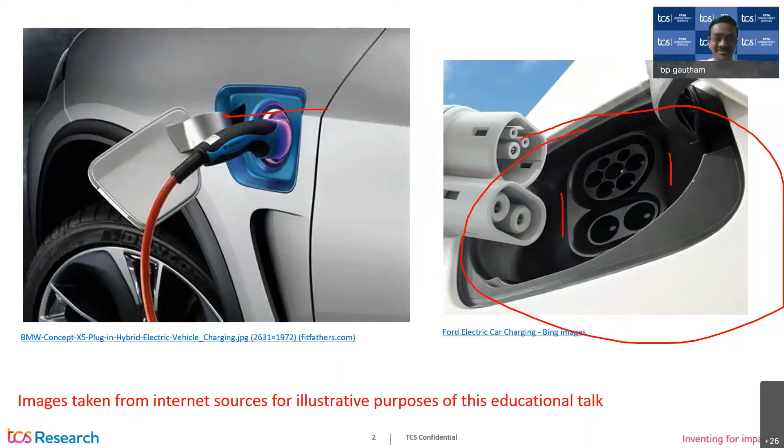So I thought I would give a very interesting though unusual example where people unexpectedly stepping on something cause it to break. But if you really go to the manufacturing industry, what are the key things that everybody talks about? One is the time to market and the cost. These are problems that existed all along, and there is nothing particularly new there. But what is even more challenging these days is mass customization. People want varieties of variants of products that suit their tastes and needs. And then another major aspect is to take care of sustainability.

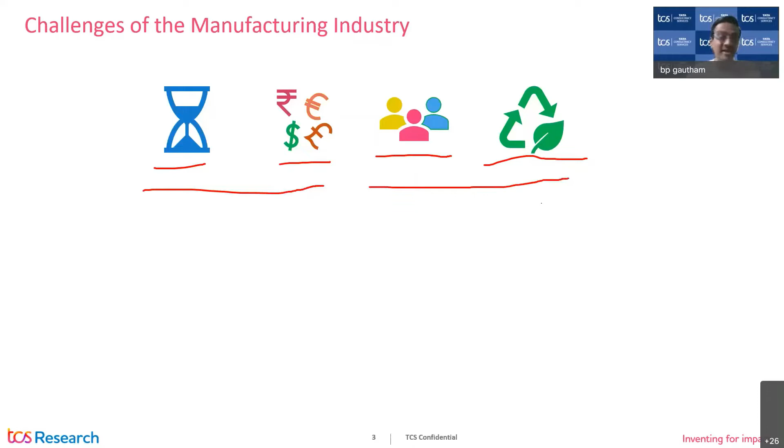It is no longer about recycling, but it's also about cradle to cradle. That is what is required. So besides these two aspects and the increasing competition, the mass customization and sustainability is introducing even greater challenges.

So one has to look at the entire life cycle, all the way from raw materials where they are sourced to the intermediate material products, and how we design using these intermediate material products from component levels to systems level, how these are manufactured and how do they manifest as products, and how do you take care of their service, and how do you really look at the end of the life.

All of this has to be kept in mind while making all the design decisions that we are making and the manufacturing decisions. When I say design, it is about product design, it is about manufacturing design, it is about service design. All of that have to come into picture.

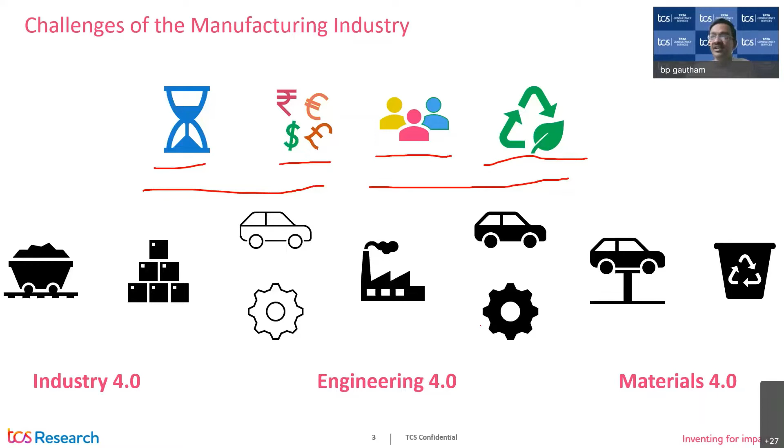And needless to say, the big buzzwords that you keep hearing are industry 4.0, engineering 4.0, materials 4.0. Well, these are very nice, catchy phrases used well and abused equally. Nevertheless, they convey a message that there is a large amount of industrial transformation that is occurring, and it is predominantly driven by the world of digital of various forms, and that is what is going to make these additional responsibilities that are coming on the manufacturing industries happen.

So what is the need of the hour is to look at the problem in an integrated fashion across materials, processes, products. Very often while designing the products, people take material as some kind of a catalog system and use those products. Of course, there will be local manufacturing knowledge associated with it, but there is generally very little tight integration with manufacturing while taking process decisions, while taking product design.

So this is something that has to be brought in, and that is what we feel, at least I believe, will bring in a significant paradigm shift in meeting the needs of modern product engineering, whether it is sustainability, whether it is lightweighting of an automobile, whether it is reducing the cost, all of these aspects.

So for the needs, as we discussed, we require an accelerated product development. So right in the early stage, we have to consider many aspects, including manufacture and recycle. Needless to say, we have to reduce prototyping and experiments to accelerate the product development, and a huge amount of focus on sustainability and circularity is also driving a lot of product innovations these days.

That requires working very closely with manufacturing processes in the product development. So we need to optimize the whole thing in an integrated fashion, integrated with processes. And when you're actually manufacturing, knowing exactly where we are going to use the products, if there are deviations, we need to take dynamic process decisions, and all of that learning coming from the plants has to feed back into the design.

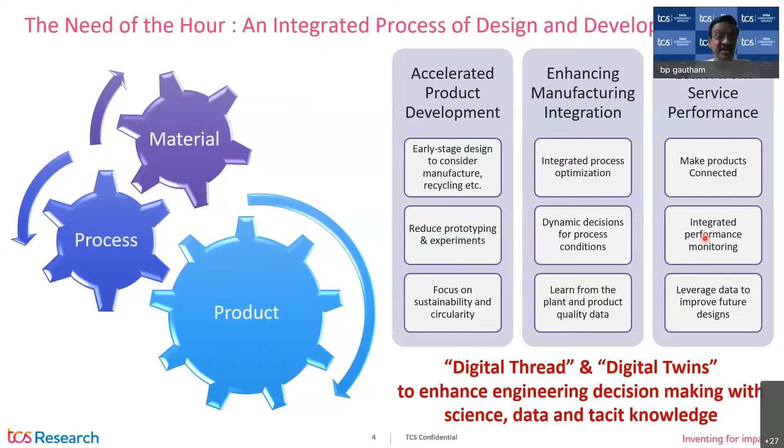So I will focus predominantly from a materials perspective in this talk. So what are the challenges with materials? Materials development and their deployment take a huge amount of time. If you take an aerospace material, the typical cycle is about 20 to 25 years, from the day you conceive a material, to develop that material, produce it in a form that is robust enough to be used in an aircraft, establish the design allowables with which you can design an aircraft, and put it in, design it and test it out.

It's a long cycle. And in automotive, typically, it is not uncommon to talk about anywhere between 8 to 10 years to introduce a material and start designing with it. So it's a huge amount of time. Why? That is because of the complexity of the materials, right?

We are talking about all the way certain effects will be at a quantum level. Sometimes corrosion is impacted by the electronic behavior of the underlying material and so on. The material itself is going through a huge cycle in which it is evolving all the way from raw materials to intermediate products to final products that are going into, let's say, our vehicles. I will take vehicles as an example to drive most of my talk today.

So what we need is discovery of materials with desired properties and recyclability. Now recyclability is becoming a big issue. That is something very, very important, and for next generation materials, this will become a driver for the new materials. Scaling up of processing from lab to bulk: very often materials fail because we can produce and show fantastic properties in a lab, but they can't be produced in bulk with repeatable, consistent properties.

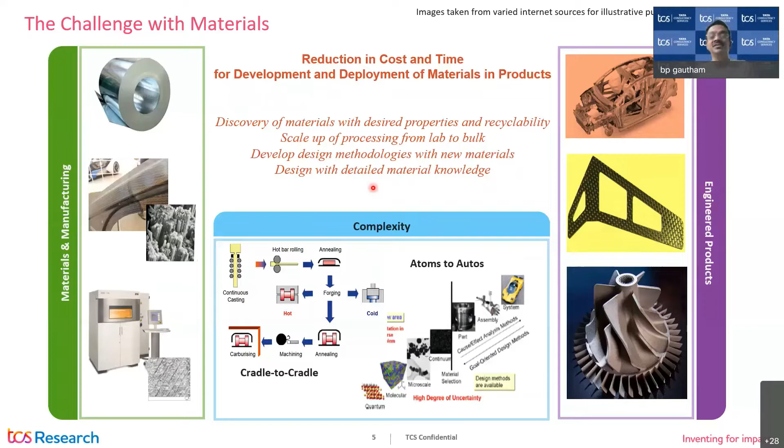Even if we have, how do we design with it? This is a non-trivial problem. People often don't understand how complex the actual industrial design problem is when you're using a material, what kind of information you need. So we need to be able to do all these designs with very, very detailed material knowledge, something that is expressible. Sometimes it is not easily expressible. So considering that, some of the aspects that have come out,

Okay, fine. So the concept of integrated computational materials engineering has taken root around 2008. One of the earliest reports, published by the National Academy of Sciences in the US, where the word ICME is coined, says it is to enable optimization of materials, manufacturing processes, and component design long before components are fabricated, by integrating the computational processes involved in a holistic system.

So if we look at the history of, again, let me stick to the automobile industry. When I was a student back in the late 90s and visited an automotive company, FEM was still a very fancy tool at that time. When I asked some of the design engineers how they design, they were still working with this thick book of Roark's formulas and so on, making those decisions. And when I talked about FEM, they laughed. They said, oh, it will just give colorful pictures. It is of no use.

But today, if you go to an automotive company, no design occurs without FEM and CFD as a backdrop. And a similar kind of revolution is occurring with materials. It is more complex, no doubt about it, but there is a huge amount of developments that are happening, and that is something that just leverages.

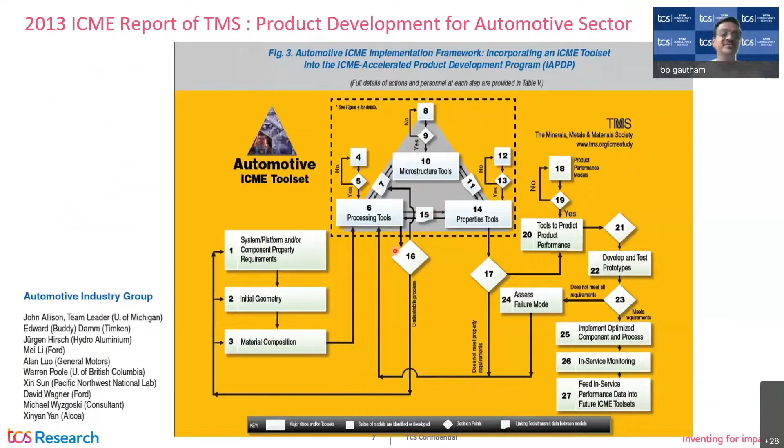So just before I switch to what we do, within the same report, the second one I talked about, what TMS has envisaged is a tight integration of materials modeling into the entire product life cycle development. So if somebody is looking for these aspects, I would certainly recommend this report. It's a fantastic report with a very, very strong industry view. I would recommend anybody who is interested to read this report.

So now, what is it that we do in our team? If you look at the product life cycle, all the way from gathering requirements, as I talked about in the opening example, right? We didn't even anticipate that somebody would be stepping on that to reach the top of the car, to plug-in charging systems, to the recycling portion of it. Across this, we look inwards from a materials perspective to bring in material-aware design of products and manufacturing processes, broadly driven by the concepts of ICME. We also work on looking outwards, from physics, data, and knowledge-based modeling for product design to operations reliability. Today, I will focus more on the materials and looking inwards aspect.

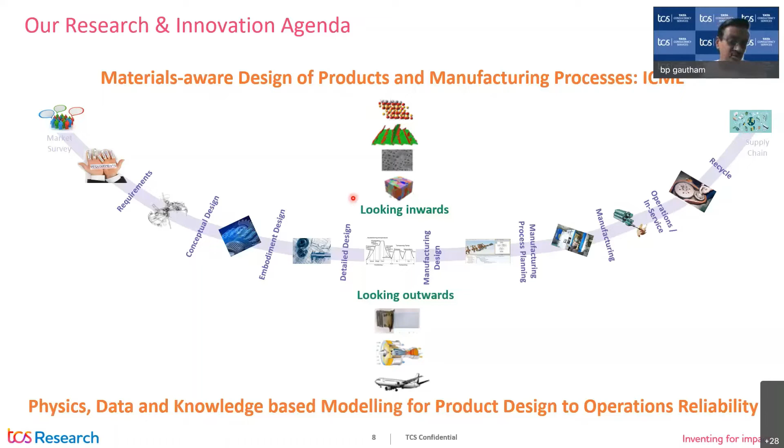To achieve this, we work in various areas of research: process modeling and simulation, multi-scale modeling of materials. We also look at various aspects of how do we do design. So generative design is another new concept that is coming up quite a bit, and because of the computational methods and infrastructure going up, you can actually explore lots of options, and generative design gives a very strong view of

this. Of course, you should look at systems engineering when you're looking outwards, or actually even materials can be seen as systems. The use of data sciences and machine learning, and something very unique we work on is how do we model knowledge? Broadly in the area of engineering, how do you really model knowledge and make it available to people at the right time in the right context?

While we do all of this research, we also convert this into technologies. We are also developing a digital platform to enable all of these things in a seamless fashion in an industry. That is called TCS PreMap. We are also working closely with IIT Kharagpur in one of the projects, which I will briefly touch upon on my last 1.5 slides. So let's look at one problem without going a lot into the details.

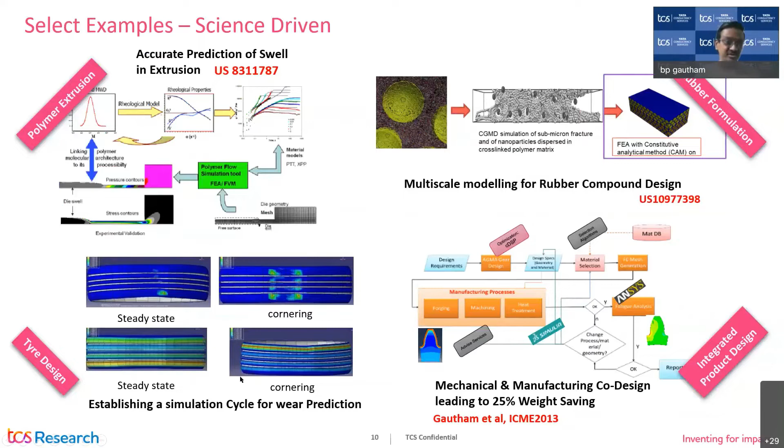We are talking about deep molecular level science. Here we are talking about rheology. Here we are talking about the structural behavior and the wear. But this is not going to be sufficient all the time. So we also look at a lot of assistance from AI. I will touch upon this again.

Something like fatigue: however powerful the simulation tools you have, because of the very nature that it is statistically tail properties that will determine the fatigue properties, it's a much tougher job to scientifically predict. So here we merged science and AI.

Or if I want to solve an inverse problem in a manufacturing process, it's very complex, because you can achieve the same end state through a variety of routes, and the problems are not naturally invertible. So how do you invert it? The typical way is to put it in an optimization framework, but complex problems of this nature don't work. So again, we use concepts like Bayesian nets and so on to more easily solve the inverse problems.

Or explore. You want to explore, but you don't want to run a huge amount of simulation. So you want to do every new simulation intelligently. And how do you really do that? I have done 10 simulations. I want to do my 11th simulation intelligently after learning from my 10 simulations. How do you do that? These are all the places where AI or machine learning helps.

And one more aspect, this is again a common thing: if you are going into material science, people always talk about microstructure, or structure at various scales. And there's a huge amount of interpretation by experts out there. And when we go to industry, often this becomes a debate point. Section A blames section B, section B blames section C. If you go to a steel industry, the rolling mill blames the casting section: oh, you didn't give me a good thing. The caster says, no, your rolling is the problem. Or ultimately, the guy who's forming the sheet, their customer, will say the problem is at your end. Sometimes the problem could be at that end.

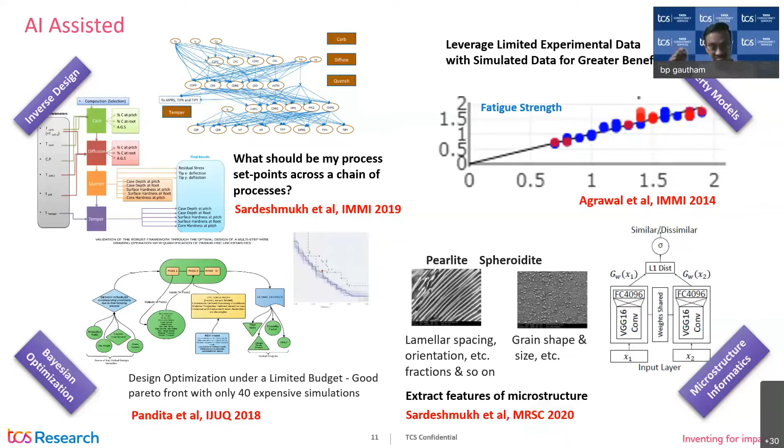So whenever these problems come out, people get into deep microstructural analysis. And how do you interpret it? It's more of an art than a science. So we are trying to use AI and ML to convert this art into a reasonable science, to the extent possible, by trying to figure out understandable metrics from these kinds of structures. So we looked at AI.

Now I will talk about something a little different. Actually, we have a lot of knowledge. This knowledge is available in a variety of documents. If you go to an industry, they look at a lot of their past reports, which become their guidance. These are extremely rich sources of information, and there's a lot to learn. So another thing we are looking at is natural language processing and other forms of AI to glean and curate information from a variety of documentation sources to help us take decisions. Because somewhere something is there, and if I'm making a decision in an integrated fashion, I need to collect all that information together.

So for example, a very complex search. If I have a bunch of documents related to steel, I want those documents where the carbon concentration by weight is between 0.1 and 0.5, which has been subjected to a tempering process for over 20 minutes in some temperature range, and I got elongation more than this. A very complex query, right? So we have worked on this kind of thing.

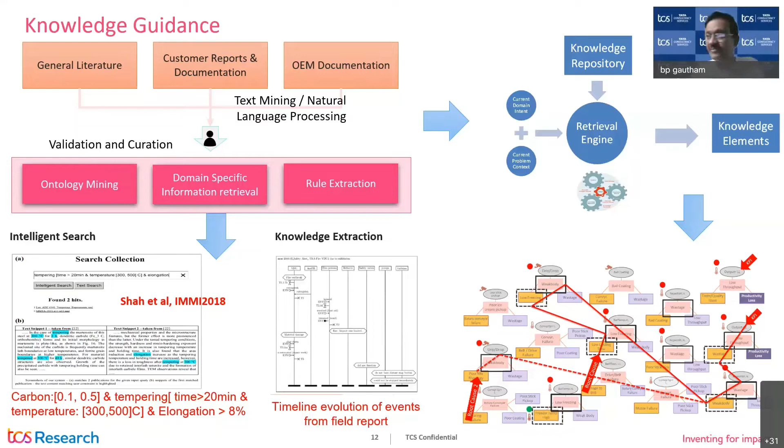These tools will also feed a lot of information at various stages of decision making, because there is already some knowledge out there. So get it right at the right time, in the right fashion, rather than somebody trying to remember off the top of their hat that, oh, I read that paper someday. That's good, but it doesn't always happen. So that's the kind of stuff we are working on.

And then the last is the decision aid. That was about providing information. But if you want to make formal decisions, you have to adopt a lot of decision aid techniques. For example, this is work that we have done quite a bit with Farrokh, Janet and Jitesh, on robust optimization using compromise decision support.

So you can explore the design space. You can explore the design space with robustness. Very often, we don't need absolute optimal conditions, or rather, as Farrokh says, optimization of a complex system is an oxymoron, because that's a reality, because we don't know so many things. So what we want is something that works, something very good, that is acceptable, but also I don't want something

extremely sensitive. So for example, I have designed in such a way that I'm subjecting it in between to some heat treatment process, and I say that, okay, you have to do heat treatment at 950. In reality, I may end up having plus or minus 5 or plus or minus 10 degrees variation in my process. And if I have to maintain within plus or minus 1 degree, no industrial process can do it if you are doing a huge heat treatment on a large scale. So it has to be a robust process.

So these are the kind of things, or fuzzy ranking selections. And again, I mentioned a lot of new concepts that are coming on generative design, though it is a little bit different problem, but still a design problem in which we are working. If you really look at oil wells, this is an oil well which is picking up oil from a subsea. Then multiple oil wells are connected to what are called manifolds, and these multiple manifolds are connected. Ultimately, it goes into a ship up there. Extremely complex system of systems.

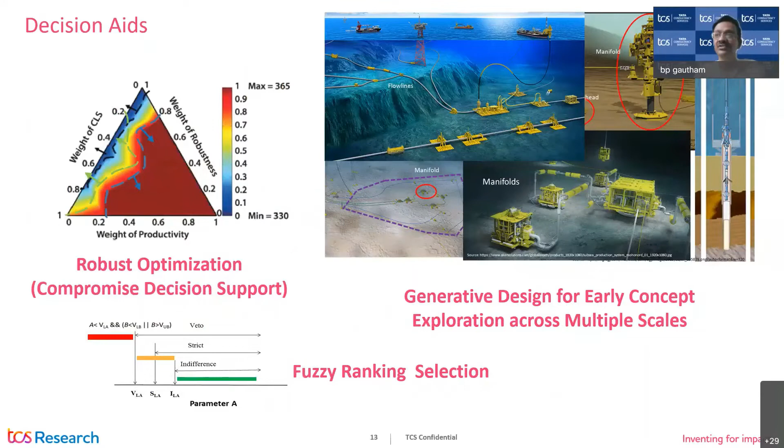So far I have given a very generic overview. So I will go a little bit deep dive into one specific problem. So this is about designing gears. Gears are very important transmission parts. Probably electrification is reducing the need for gearboxes in the automotive industry, but gearboxes are still very, very important in many other industries.

The typical vision that was talked about, of course it's a little dated, but the target is 2025, which is still 4 years away, is that they want to improve the power density in a vehicle by 25% every 5 years. That's a big ask, actually. So that's a kind of a strong thing that we are talking about.

So the challenge problem one of our customers has given us is that they have a particular gearbox which is used in trucks. They want to increase the load capacity of the truck, the engine torque. They want to mount a larger, more powerful engine which produces 30% more torque. It's a mining truck, so it can work under more complex situations. But the challenge they have given is that I have a gearbox, the footprint is given, you can't touch it. That is number one. So that means you have very, very limited geometric freedom.

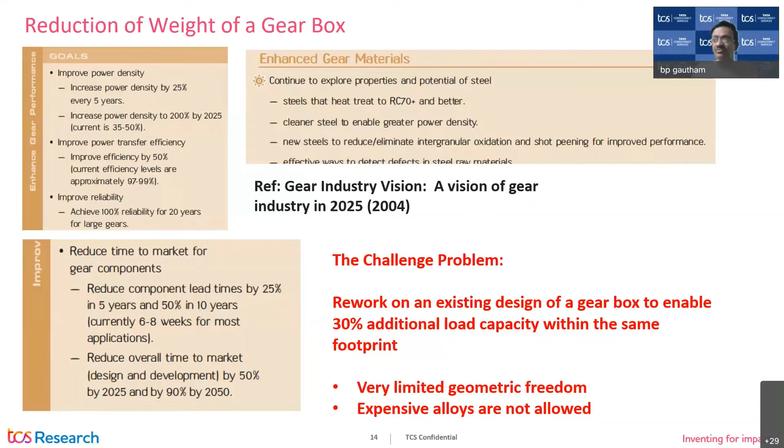The second thing they said is, don't tell me that you should use Ferrium grade steels. That's way too expensive. At the most, you can tweak my composition a little here and there so that I am well within my cost limits. So with that, we started working. Typically, how gear design works is that people do a preliminary design using certain standards. AGMA is one of the standards, but people do modify those AGMA standards and make some design. As part of it the materials are also selected, and then a finite element analysis typically is done for more detailed analysis, and that's frozen.

The material is assumed to have certain properties which come out of some testing. So what we have done here is that we integrated the manufacturing process in a steel gear. The most important manufacturing process is the carburization quenching process, which imparts the hardness to the surface of the gear in a desired fashion.

But it also introduces a lot of stresses onto the surface. In some situations they are beneficial, in some they are detrimental. So can you manipulate this, the material composition and the properties, by playing with the process without going to very exotic alloys, probably with minor modifications in the chemistry? Can I address this problem? That is how we looked at it, and of course we were able to solve it.

So in this whole structure, in the early stages, the generative design or concept exploration, we used the concepts of compromise decision support. That's where, as I mentioned, we worked with material selection. This is very straightforward. What we see on the right, the fatigue analysis, is a very standard thing.

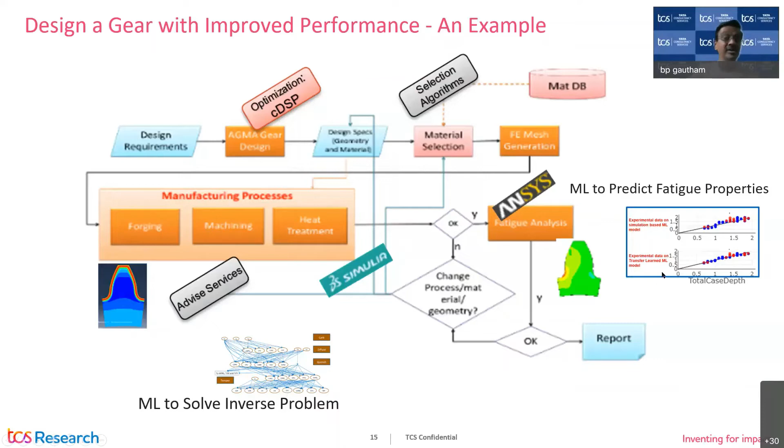These are the standard simulations, but here it's multi-scale modeling that we have done. We needed to solve a lot of inverse problems, so we used machine learning. I will talk about them in the next couple of slides. A lot of ML was also used, because there is not one single way we can solve this whole problem. So this is the science part of it. This is multi-scale modeling. I'm not getting into the complete details of it.

How the phase transformations will occur, what precipitates will form at what kind of temperature cycles, what the resulting hardness will be, all of that, and the residual stresses, we simulated. This is the science. But one big problem that came into the picture is that my computational materials engineering is fairly good at giving decent values of the yield stress, hardness, and so on.

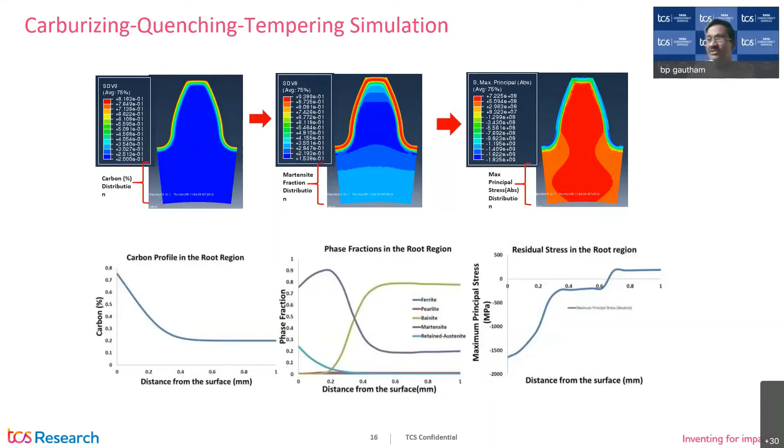But it is not good at giving me fatigue values, because fatigue is an extreme value property that depends on the distribution of the microstructure. I will not get into those details, but it is not able to give them. Yet the most important property required is fatigue. Of course, strength and hardness are equally important from a wear and other properties standpoint. So this is where we resorted to an application of AI and ML.

So we have some properties that are predicted. We have a certain database from the past: processing conditions and composition to fatigue properties and their distribution. So we used the concept of transfer learning. We predicted fatigue properties from the hardness using thumb rules, and then corrected them with actual data using transfer learning. So we have a far better predictor for my fatigue value.

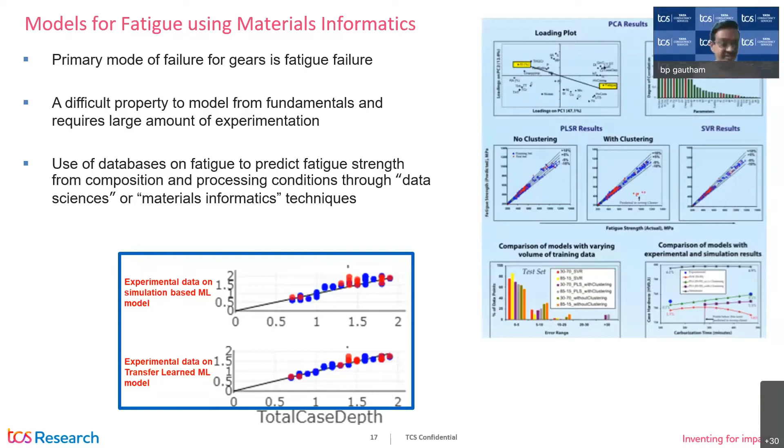Had this not been there, our ability to theoretically, computationally predict fatigue values with the existing state of the art is very limited. So machine learning helped us, and that fed into our fatigue analysis. The residual stresses, the properties computed directly and indirectly, all of this led to my analysis. And when we close this whole loop and optimize it or explore it towards better design, we get better design.

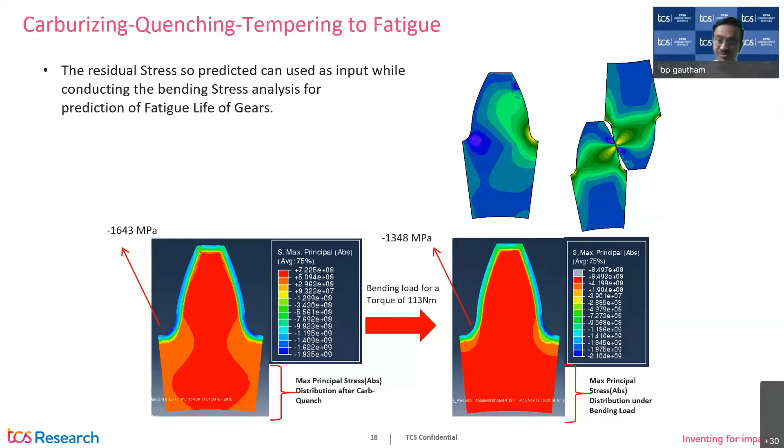So in this process of exploration, as I mentioned, we looked at various compromise decision support based techniques to explore a certain space. The inverse problems, especially in manufacturing, are very complex to solve, as I mentioned already.

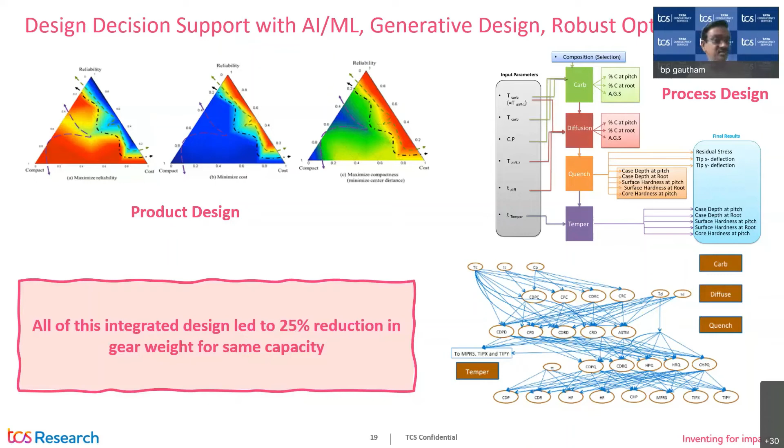So we used Bayesian network kind of techniques to solve these inverse problems, and putting all of these, we were actually first able to show that you will be able to achieve a gear of the same capacity with 25% less weight. Of course, now you translate that to the same size gear having 30% more ability to take load.

So this is another example from the wind industry. Wind blades. Again, the problems are very similar. Large wind blades, right? People are now looking at much larger wind blades, and these are all made of composites. In composites, decisions are inherently material and product design that have to go together. But what is more complex here is that we still make a lot of assumptions on curing. And indeed, the degree of cure, because these are giant structures, has a large impact, and we end up giving a huge amount of margins of safety to avoid distortions, failures, and so on and so forth.

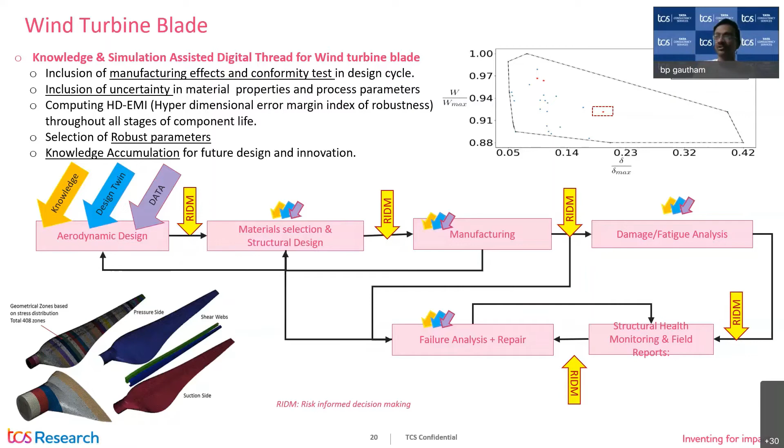So we introduced, once an aerodynamic design is done, material selection, design to manufacturing, where looking at damage becomes a function of the degree of cure, and so on, to solve and address this problem. Some more details are here. So we started modeling all the way from microstructure level, that is fiber matrix interfaces, to subsystems, how they distort, and what will actually be the impact of the curing cycles on the properties.

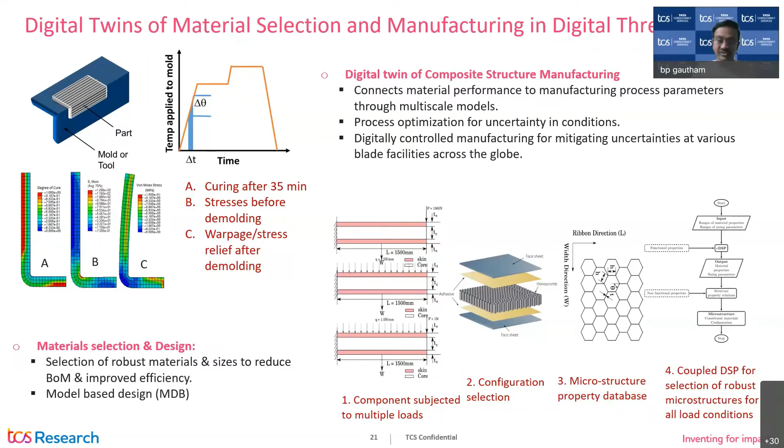And when you actually cure the whole blade, not every point sees the same kind of thermal cycle. You can't control it at a point level. So how does it happen? We linked up all of this stuff, and it led to certain improvements. So I gave a very broad overview of a couple of examples of problems.

Now, let me touch a little bit on what actually happens. If these are all fine, you can solve these problems. But if you want to industrialize it, it is not easy. You have to make things available for people in the industry to easily use these tools and techniques to solve their problems. And this is an even bigger challenge than doing some research. I'm not discounting the research, but telling people, hey, these kinds of techniques work. If you just say it, it won't work; you have to demonstrate them. Even if you demonstrate them, you have to make it easy for them to use, and so on. That is one part of it.

Now, the kind of problems I talked about, you have seen varieties of stuff there. We are talking about materials simulations. So we are looking at microstructure evolution, phase evolution, sometimes precipitate evolution in the material. Each of these things uses different kinds of tools. Then we feed that into a finite element analysis or something of that nature to do a stress analysis of the part. And also there is a design. So there are varieties of tools that have to be used.

So with these tools, sometimes the information has to flow in what we call vertical integration. So microstructure to mesoscale to the properties of the materials, which is a multiscale problem, but the same material is going through 2-3 processes and then actually in service. So this is a horizontal process, and you have to use varieties of tools to make things happen. So this is simulation integration and scale integration. And then we have to do design using these two different aspects. So you have to enable the design integration.

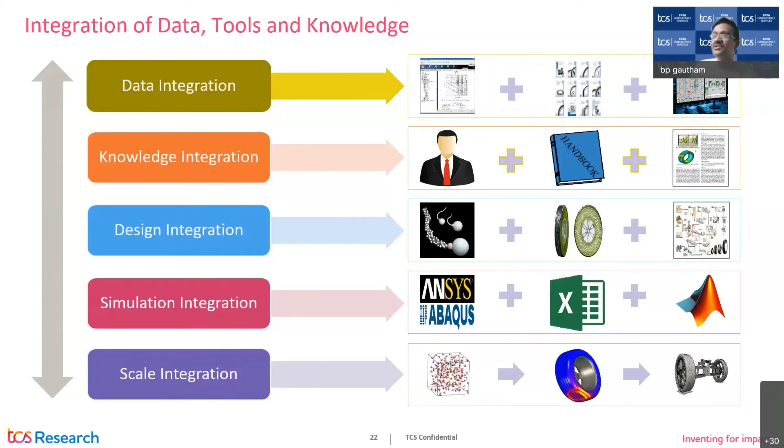So that is where we have built this platform called TCS Premap. I will not go into a lot of details on this. It's a platform for digital transformation of engineering, operations, and decision making across the product process lifecycle. So that's what we are talking about. So how do you enable that?

You require certain semantic connectivity across various ways of expression. You should be able to link these tools. All those integrations I talked about should be very easily done. So that is what is being facilitated. I'm just not getting into the details of this.

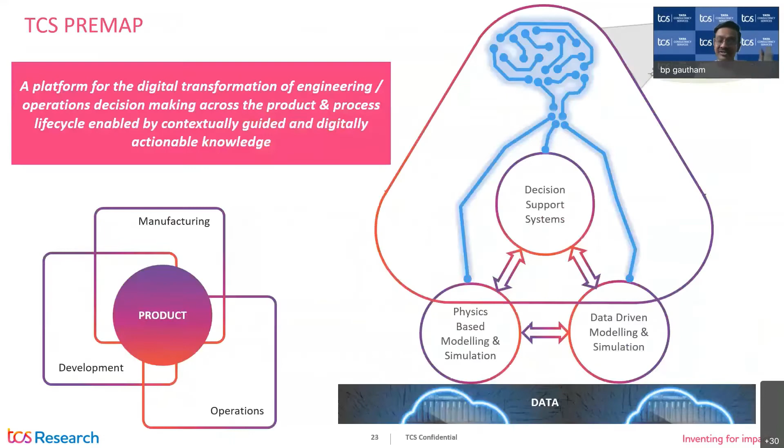So before I close, it's also a work that we are doing with IIT Kharagpur. This is related to friction stir welding. Professor Paul and his students are working very closely with my team and one more team of TCS, which is based out of Kolkata, looking at various aspects where we are using simulations, and some of our colleagues are working with Professor Paul's students in bringing metallurgical aspects into the modeling of friction stir welding.

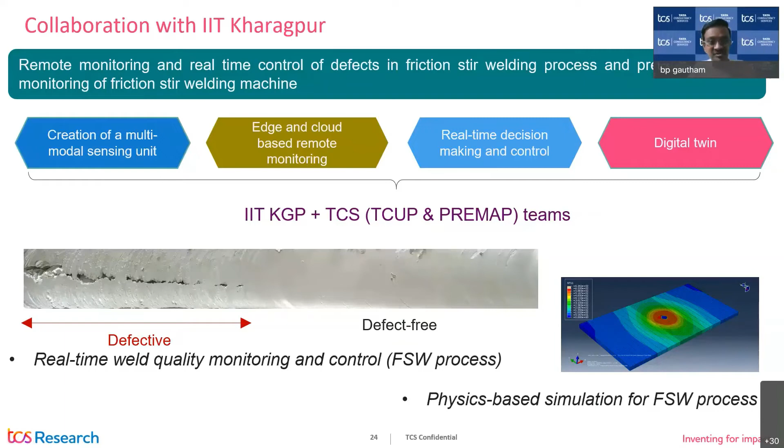We are also using the platform that I talked about, the Premap, to make it easy to generate knowledge and feed into real-time process monitoring along with another TCS tool called TCUP. So those are the two over here. So that is the kind of work I thought I would touch upon before I close.

I don't want to get into a long sermon of summarizing, but the way I see it is that future product development will tightly integrate materials, manufacturing and process design in the entire life cycle of product development. The key idea is to reduce as much experimentation as possible and improve all the processes, because that's where the time goes, expenses go, and indeed they are also not environmentally friendly. And in all of these, digital technologies are going to play a very, very important role, and they're key enablers.

So it is this kind of integration across various disciplines that will make things happen. People have to interact. I am a mechanical engineer, I am a metallurgist, I am A, I am B. I don't think that is the way we should work any longer in this world. It has to be in a very integrated fashion. And we were able to do such diverse problems only because a very diverse team is able to work together in unison.